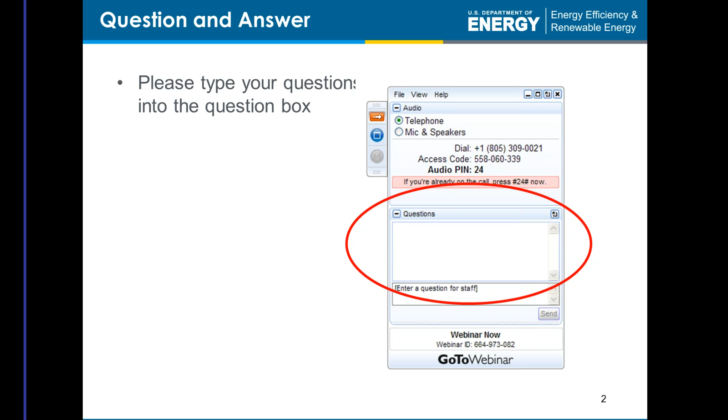With that, I would like to introduce our DOE host, Neha Rustagi, joining us from the Department of Energy headquarters in Washington, D.C. Neha has been a technology manager within the Hydrogen Production and Delivery Program at the Fuel Cell Technologies Office since November. Prior to her current role, she supported FCTO as a fellow since 2014. She obtained a master's in mechanical engineering from the University of Colorado Boulder in 2012 and conducted her thesis research on the modeling of hydrogen-assisted fatigue crack growth.

It's a pleasure to have you, Neha. Good afternoon. Thank you, Chris.

Our presenter today is Dr. Joe Ronevich from Sandia National Laboratory. Joe has been with Sandia's Hydrogen Effects on Materials Laboratory since 2012 and focuses on hydrogen embrittlement of structural materials, with a particular emphasis on welds and pipeline carbon steels and stainless steels. In addition to funding from the Fuel Cell Technologies Office, he received an Early Career Laboratory-Directed Research and Development Award in 2015 to support his research on measuring hydrogen concentrations ahead of crack tips. Prior to Sandia, Joe received his PhD from the Colorado School of Mines in Metallurgical and Materials Engineering.

During his time at Sandia, Joe has been working closely with Dr. Brian Somerday, who many of you probably know. Brian was originally going to join us on this webinar, but got called into jury duty, so Joe will be presenting for both of them. Brian has been at Sandia for 18 years, leading the Effects on Materials Laboratory and serving as a PI on numerous R&D projects related to embrittlement of structural materials in hydrogen gas environments, including projects supporting the Fuel Cell Technology Office's mission. He will be transitioning from Sandia to Southwest Research Institute in San Antonio, Texas this spring. At SWRI, he will apply his expertise in hydrogen embrittlement to applied R&D projects focused on structural metals in wet H2S. Since Brian expects to remain active in the hydrogen embrittlement community, he expects to continue crossing paths with many of you. And with that, I'm going to turn it over to Joe.

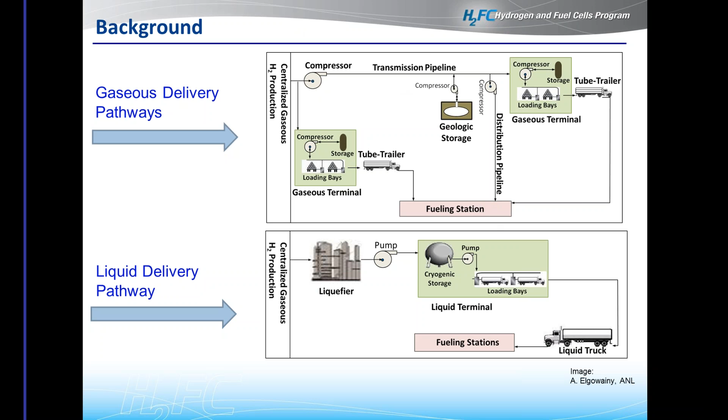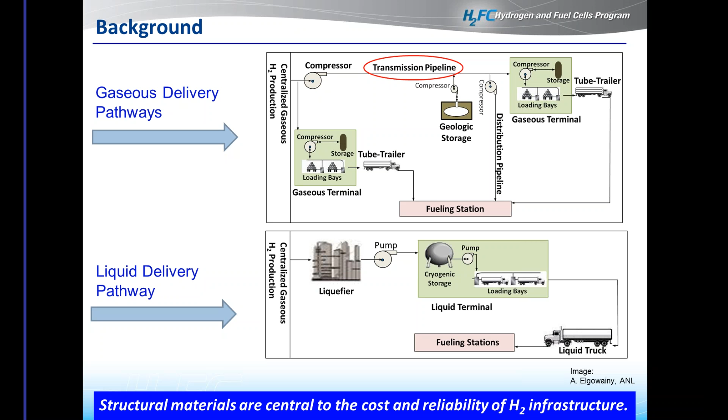In a hydrogen economy, the infrastructure necessary to transport hydrogen from a centralized gas production facility to the final stage, the fueling station, requires many different components exposed to hydrogen gas. Hydrogen in gaseous form must be compressed and transmitted over many miles of pipe, with various storage facilities and distribution pipes along the way. Our group at Sandia focuses particularly on the transmission pipeline. Structural materials are really central to driving the cost and reliability of the hydrogen infrastructure.

Welding is one aspect we need to make sure we don't overlook, because oftentimes welding can introduce other potential defects into the microstructure that we want to be looking at.

Now friction stir welding is another technique that's a little bit more modern and is a solid state weld. It requires no consumables. Essentially the weld pieces are placed together, a tool is inserted and rotated at a high RPM, allowing softening and stirring of the material. These are two different welds we'll take a closer look at during this presentation.

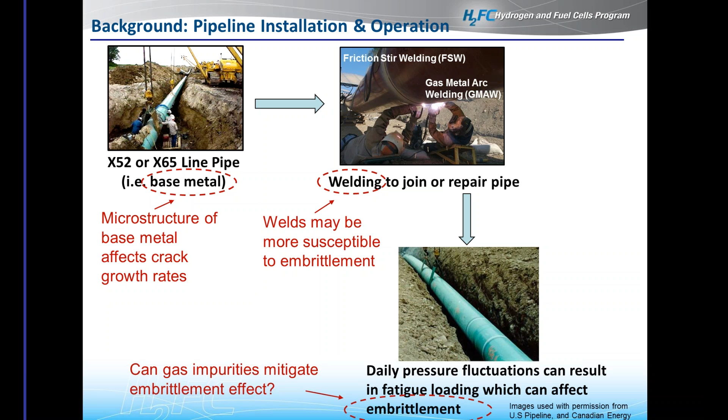The three variables I'm focused on in this talk are: how does the microstructure respond, how does that play a role in fatigue crack growth rates in these pipes, and as for welds, the lack of literature out there until recently made us aware we need to perform more testing to ensure the reliability of the welds. Finally, with respect to embrittlement, I'll talk at the end about the potential benefits of having gas impurities in the stream and how they can mitigate the embrittlement effect.

But what's really important is the local stresses and strains at the crack tip. What's driving the hydrogen to a specific site, and what's happening in that local region, is where we truly want to understand what's going on.

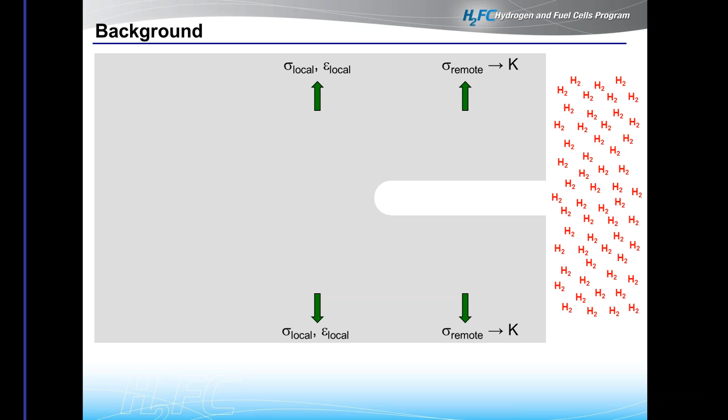If hydrogen is present, that doesn't necessarily indicate that we will have hydrogen embrittlement. There are many steps that actually need to occur in order for hydrogen to get to the site where it can cause embrittlement, and those are often overlooked. We just assume if there's hydrogen, then there's hydrogen embrittlement, but really multiple steps have to happen.

First, the hydrogen has to be able to transport down the crack tunnel, essentially reaching the crack tip. So basically it becomes a supply issue: can that hydrogen get to the site where it needs to, or where it may cause embrittlement?

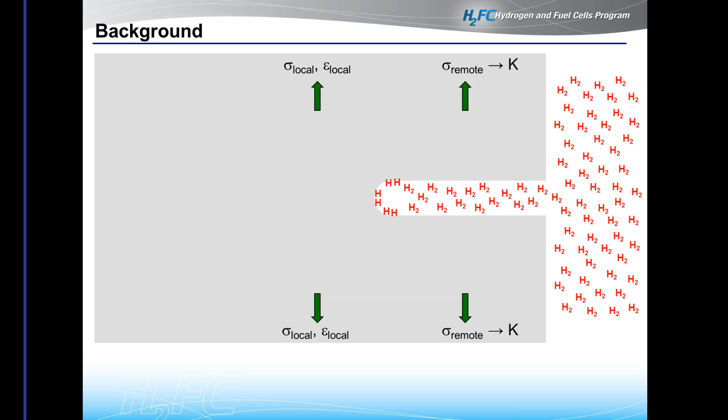The second step is that the hydrogen is in diatomic form. It needs to dissociate and chemisorb on the surface. This is just one of the possible limiting effects, but hydrogen does need to dissociate onto the surface, and then it can finally absorb into the material and move to regions of higher stress and take part in this embrittlement effect.

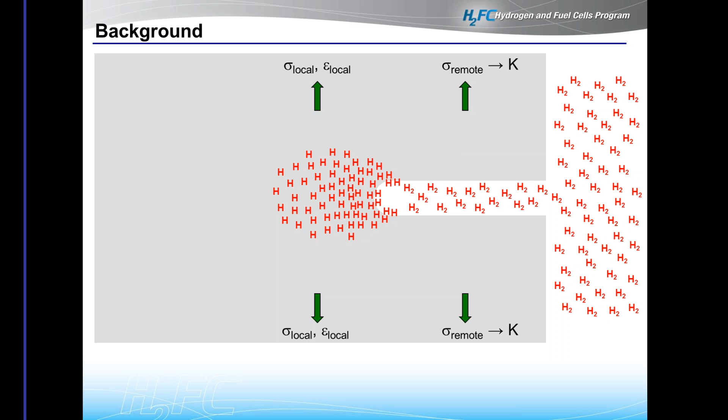So the three variables we're going to look at first relate to how hydrogen, once in the material, interacts with the microstructure. In particular, we're going to look at some welds and really the role that residual stress can have, because anytime you're talking about welds, what you're really introducing are potential changes in residual stress.

The other area we're going to look at is the effect that microstructural banding can have on hydrogen embrittlement. Banding is not necessarily desirable - it definitely is not a desirable microstructure - but it does give us the opportunity to examine how different orientations behave if we propagated the cracks in different orientations.

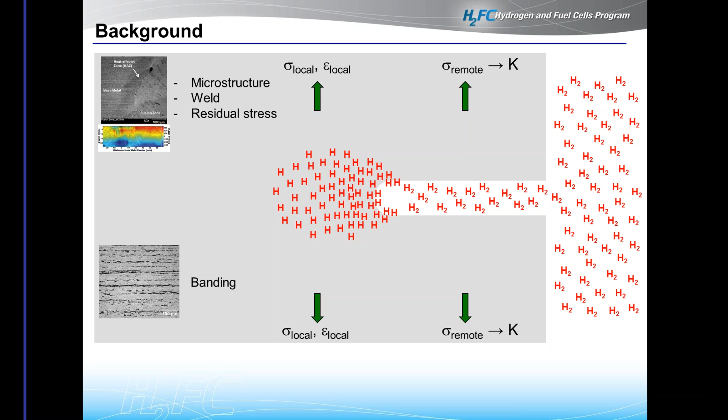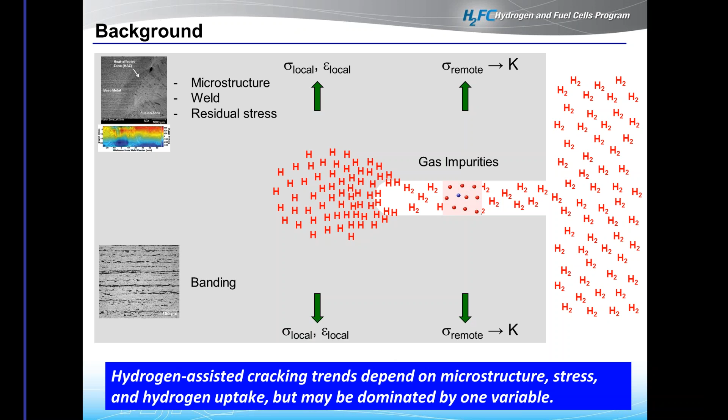And then finally, we're going to look at how gas impurities, in particular oxygen, play a role in hydrogen uptake. So the three different regions we're going to look at, and how they influence hydrogen-assisted cracking, are the microstructure, stress, and finally hydrogen uptake.

So the question is, why should we use steel hydrogen pipeline? I just identified that steel has susceptibility to hydrogen, but the reality is we have a lot of confidence in steel. We've been operating pipelines for many years, especially in the oil and gas industry, and they're quite robust - resistant to third-party damage during installation, backhoe, whatever it may be.

The reality is the idea of a hydrogen pipeline made out of steel is not unique. In fact, there are over 1,500 miles of steel hydrogen pipelines already in use in the U.S. The difference is that these pipelines have been operated very safely, but predominantly under constant pressure conditions, because the demand has been pretty constant, so you can supply a constant pressure to meet those demands.

Now, in a mature hydrogen market, the demands we anticipate will fluctuate throughout the day, throughout the year, throughout the season. Therefore we're going to introduce fluctuations in the loads to our microstructure or to our pipeline, so we need to be aware of how the base metal and the welds really behave to these fluctuating loads.

So along with that, we want to perform experiments that are realistic - in other words, testing service conditions that we actually anticipate the pipe to experience. This will help optimize our design codes so that we don't over-design our pipe in a way that costs us a huge premium, and this will help ensure the reliability of our pipe.

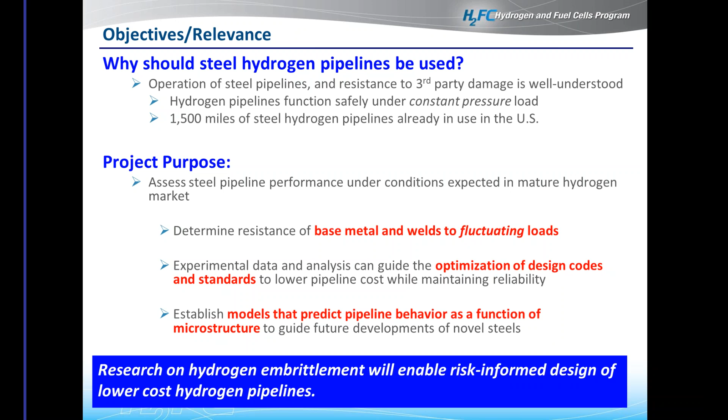So the approach we're taking here at Sandia is we have our core capabilities in our hydrogen effects on materials lab, and we're able to perform these tests in high-pressure hydrogen gas. We're choosing industrially relevant pipeline grades, and testing them in a service environment that we anticipate these hydrogen pipelines to be exposed to.

So the fatigue crack growth data that we generate is the basis for what's going into the ASME B31.12 code, which is the code that will be used by a pipeline designer to spec out what size thickness and what size diameter - all the specs necessary if they're wanting to put in a hydrogen pipeline.

I have two different welds shown here, and these are the two welds we're going to be looking at. So we're going to be looking at differences in microstructure, differences in microstructural banding, and then, as I mentioned before, at the end I'll briefly touch on how gas impurities can actually have somewhat of a beneficial effect.

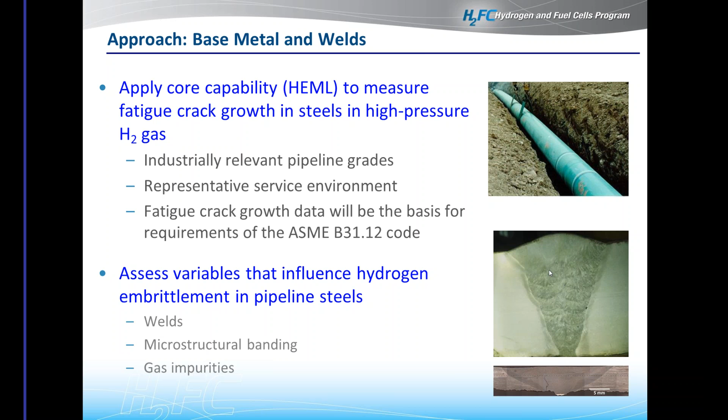The two pipelines we looked at are X65, which is girth welded, produced using a gas metal arc weld. Gas metal arc weld is a MIG welding process in which the weld is built up through consumables, and it's a multi-pass weld. You can see that the microstructure of the fusion zone is distinctly different than the base metal, and you can actually see this halo region around the weld where you have the heat affected zone.

The other pipe we looked at was an X52 pipe, also girth welded, but using friction stir welding. As I mentioned, the welding process is completely different—there's actually no melted metal. It is just friction produced by the stirring process that softens the metal and allows it to mix. So the resultant microstructure is actually quite similar to the base metal.

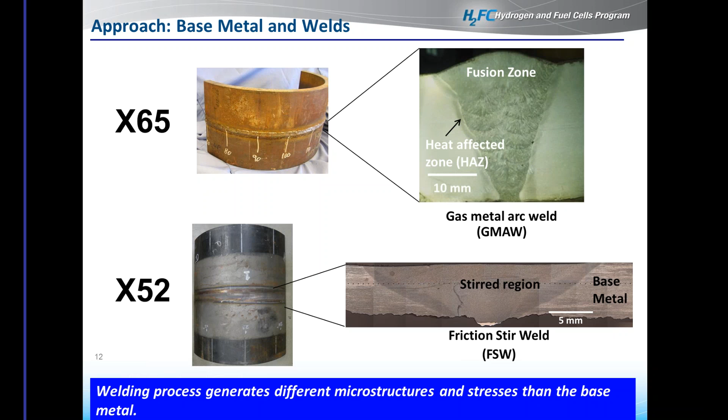So we looked at these different microstructures between the base metal and the weld. First, looking at the X65, if you look at the middle of the screen at the three different orientations of the pipe, I've called them out as L, C, and R. Because this was supplied to us as a pipe, L stands for longitudinal direction, C for circumferential, and R for radial. You can see this actually was a banded microstructure to begin with.

What I mean by that is if you look in the L and C planes, you see these distinct regions of the darker phase, which is the pearlitic region, and then the lighter phase is the ferrite. This is just an artifact of the processing technique—during original solidification, you end up with this banded microstructure. But the overall microstructure for the base metal was a ferrite pearlite microstructure.

The weld microstructure itself was distinctly different from a ferrite pearlite. It was various morphologies of ferrite, including grain boundary ferrite, allotriomorphic, and some Widmanstätten ferrite, as well as some dispersed carbides. But it was a refined microstructure as compared to the base metal.

The heat affected zone microstructure really appeared to be like an annealed base metal, an annealed ferrite pearlite, which is really what had happened, because as the welding process heats up, that heat is absorbed into the surrounding material and affects the microstructure around it.

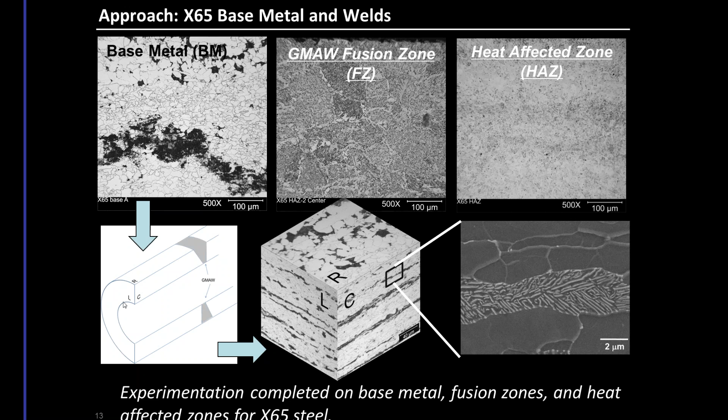So this was the first set of microstructures we looked at. I've used this schematic—I'll use it throughout the talk—to help guide where specimens were extracted with respect to the weld, and it shows the different orientations. So that's what these L, R, and C values mean.

We also looked at a friction stir weld, which was a thinner walled pipe. We extracted specimens out of the center of the fusion zone, as well as an off-center region, and the base metal. These dashed lines represent the crack plane, and in this case they'd be moving in and out of the screen. So that's where we situated the specimens, so we'd be testing a more or less uniform microstructure as the crack progressed through the material.

The base metal microstructure consisted of a ferrite pearlite microstructure. The friction stir weld didn't look all that different, although it had not as much pearlite—it had more dispersed carbides throughout the microstructure. The off-center region looked fairly similar to the base metal. But we really wanted to get a good overall characterization of how the different microstructures were going to behave in this friction stir weld.

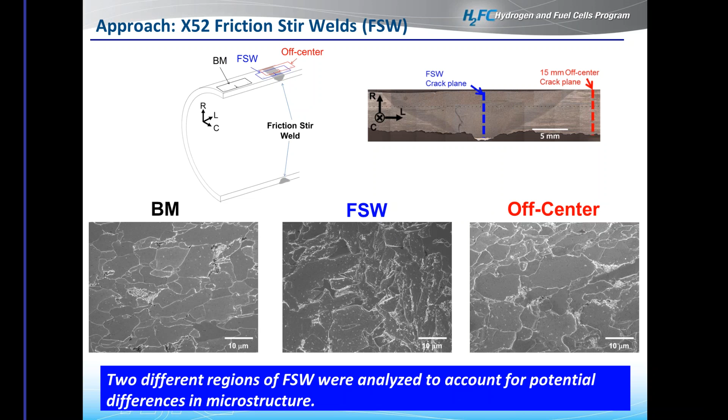Under high pressure conditions, we used two different specimen geometries, really just to match our material constraints. So we tested compact tension specimens as well as single edge notch tension specimens.

For the loading applied, we consulted with the ASME B31.12 committee, and it's an optimization of testing frequency and R ratio. These tests were performed at an R ratio of 0.5. What that means is, if the maximum pressure of our pressure vessel is 3,000 psi, we're cycling between maximum pressure and half the maximum pressure, so 1,500 up to 3,000.

That's what we're really trying to simulate by this. The frequency that we tested at was 1 hertz, and this became a balance of testing at lower frequencies. We've observed that the effects of hydrogen can be more dramatic or enhanced, but really it's an optimization, because testing at lower frequencies requires a larger amount of time for the test to complete. So that's the parameters we settled on for the majority of our tests.

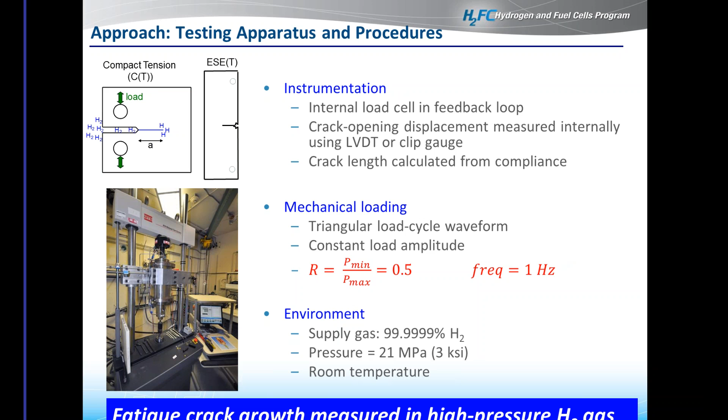So in order to really optimize what we're trying to do here, we want to perform experiments in the condition most similar to what the pipeline will experience. We can do these tests in high purity hydrogen gas and develop fatigue crack growth curves that look just like this. Essentially, from that, we can incorporate them into a fatigue life analysis based on a fracture mechanics approach.

In other words, if we have a pipe and we know we want to move a certain volume through it, that dictates a bit of the radius. We assume we have an initial flaw, identified here as A. We can then use these experimentally measured fatigue crack growth curves and essentially get a fatigue life of the pipe.

So if we have a pipe that we want to last for 50 years, we know what the critical crack depth is. If we design with a safety factor of 2, so we want the pipe to get 50 years of life while the crack is still only at half the critical depth, we can do those calculations now that we have experimental results from fatigue crack growth relationships. That's really the ultimate goal of our work.

We're doing a lot of the experimental work, but it's nice to see, and I'll show a calculation towards the end of the discussion, how we've incorporated our measurements into these calculations to predict what thickness pipe is required to satisfy this criteria.

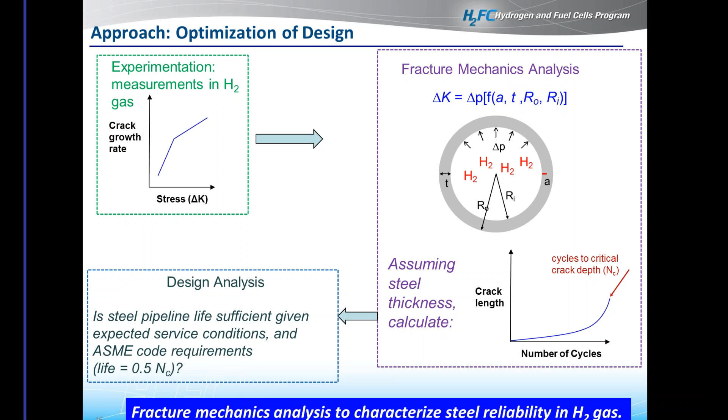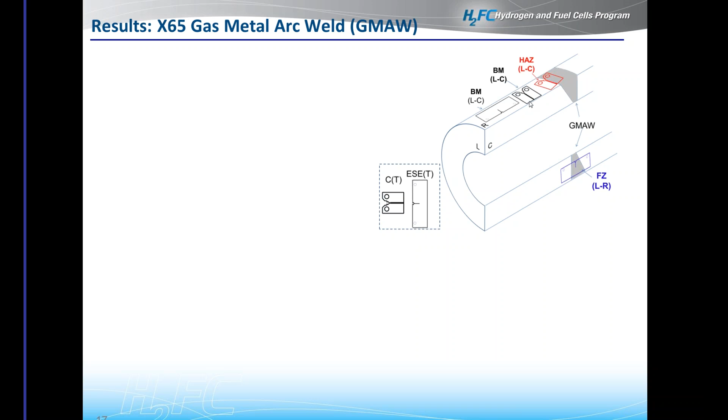So the results now of the X65 gas metal arc weld, these schematics up here serve as a legend for the fatigue crack growth curves. We tested in the fusion zone, and they also show what specimen geometry was tested for each condition. We performed tests of the fusion zone here in blue, the heat affected zone in red, and the base metal in black. So what we have here are the fatigue crack growth curves.

Backing up slightly, what this curve represents is on the x-axis we have the delta K applied, which is the stress intensity factor applied, or the driving force we're supplying to get something to happen. The y-axis is the crack growth rate, which is the material response. So we're basically applying a driving force and measuring the material response.

As you look at these curves, first of the base metal tested in air, shown in black, this is the typical trend you see in a more inert or air environment, where you see a very linear trend - with increasing delta K applied, you get an increasing crack growth rate, and that linear response is pretty common.

The terminology of hydrogen accelerated fatigue crack growth really comes from looking at these lower delta K regions. You can see the 3 different microstructural regions we tested were the fusion zone, base metal, and heat affected zone, and the crack growth rates begin to accelerate at these lower delta K regions. This is where the terminology hydrogen accelerated fatigue crack growth comes from.

So in general, all 3 showed similar relationships on a very macro scale. At lower delta Ks, they became somewhat coincident with the data in air, and then you begin to see them accelerate quite rapidly, then somewhat follow a similar slope as the data in air, albeit about an order of magnitude faster crack growth rates than in air. Looking more closely at the details, we ran triplicate tests of each condition and saw good repeatability among them.

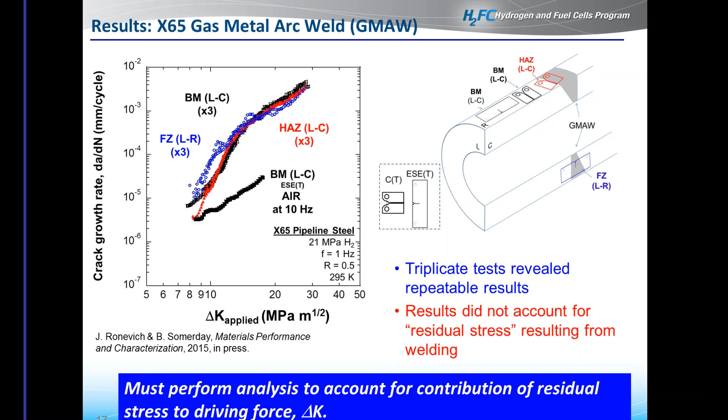So we knew we needed to perform a little bit more analysis to tease out what was going on with residual stress and how that was influencing our applied driving force, or the effective driving force, I guess. So we did some further analysis specifically on the heat affected zone.

And what we found was when we removed the effects of residual stress, we got a shift in the curves. I've identified them as the non-corrected version, which was what we saw on the previous slide, and the corrected version that's shown now on the red dash line.

And so really what this dAdN versus delta K curve shows us now is that once you remove the effects of residual stress and use a known driving force, you can actually measure the material response more accurately and more reliably.

The reason we're doing this is that a 1-inch thick weld pipe that is welded together is going to have different residual stresses than a 1/4-inch thick weld pipe or a 1/2-inch thick weld pipe. So the fatigue crack growth curves on the previous slide really don't differentiate that. It's just what that exact pipe is.

And our ultimate goal is to characterize the intrinsic microstructural response to hydrogen, and we can't do that if we're masked by some residual stress. So this essentially represents a more accurate presentation of what's going on with heat affected zone microstructure as opposed to the base metal.

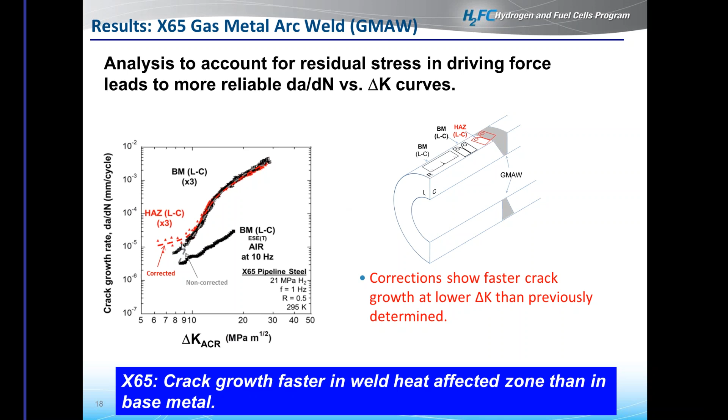Now we also looked at an X52 friction stir welded pipe, and as I show here in the schematic on the right, we looked at 3 different areas: the base metal, the blue is the center of the fusion zone, or center of the friction stir weld, and then the off-center region is shown in red. As I mentioned before, the dashed lines represent the areas where the crack plane would be propagating through.

The results of these: first of all, the base metal in air shows very similar trends to what we saw with the X65, a very linear response. And we also see hydrogen accelerated fatigue crack growth in these X52 pipes.

The 3 areas: the friction stir weld had a slightly higher crack growth rate than the base metal, which is slightly higher than the off-center region. And once again, we saw very good reproducibility or repeatability among triplicate tests.

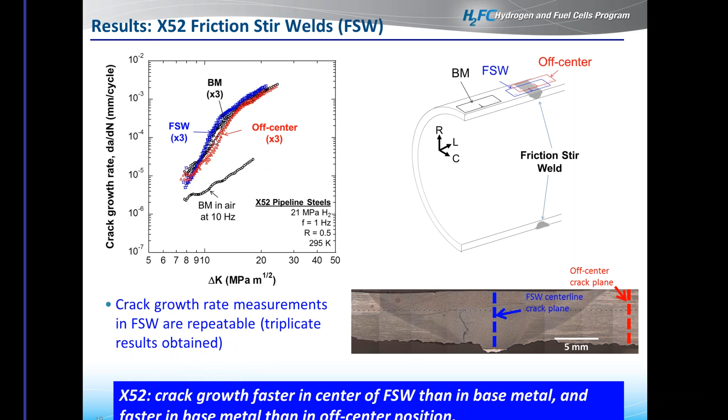So what happens when we take all this data of all the welds that we've tested and put them on one plot? I've only used single curves for these because it got a little messy if we tried to plot them all. But what you see here is you have the X65 girth weld, which was a gas metal arc weld, and the X52 friction stir weld.

We also borrowed some data from our friends at NIST, who'd done some testing on the X52 vintage girth weld, so it was a weld made many years ago. And what you see is the overall trend is that they're behaving quite similar, especially when we compare them to an X52 base metal.

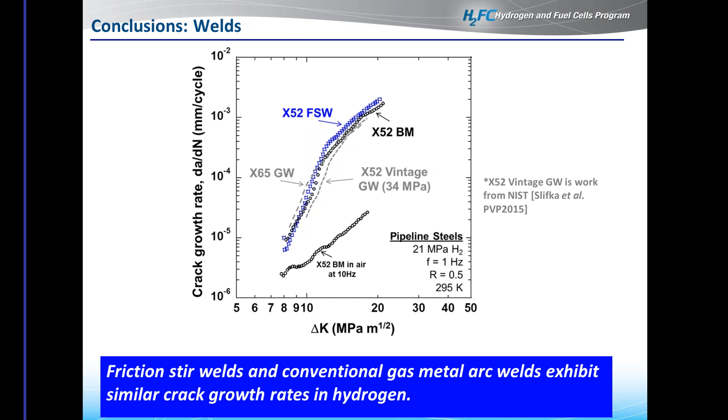And so this is very encouraging because it basically opens the door for other welding techniques such as this friction stir welding, and we see that we're gaining confidence in the reliability of that weld.

Now we also took a little bit of liberties in the fact that we had a banded microstructure. So one of the questions that comes up is how does microstructure really impact the fatigue crack growth rate? Does it really have much of an effect, or is it that dramatic, or can we call it all kind of the same material?

Even though this is a ferrite pearlite steel, the fact that it is banded gives us the capability to test the material in different orientations. If we propagate the crack through the microstructure, for instance in the CL and LC orientations, these dashed lines represent the crack plane. You can see that they're encountering the same microstructure as they propagate through that cube, essentially parallel planes of ferrite and pearlite, so maybe they'll behave similarly.

That's what we would anticipate. The LR orientation, as you can see on the top of the cube, is now propagating through these layers of ferrite and pearlite.

So although a banded microstructure is far removed from what we'd call a technologically optimal microstructure to look at, we can use the fact that we have this pipe material in our hands and do testing which will allow us to really see what the effects of microstructure are, and really different extremes.

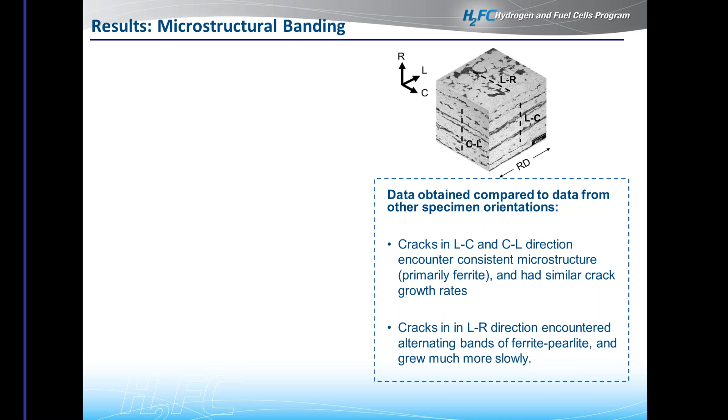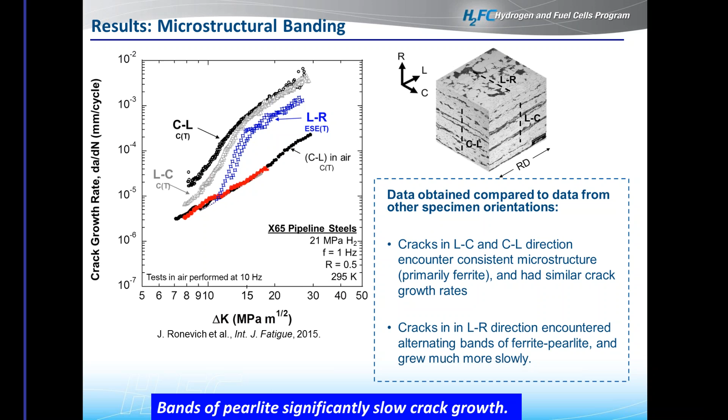Now contrast that with the CL orientation, in which we have short circuit pathways for hydrogen to diffuse through the ferrite, and hydrogen is therefore able to move through much more quickly, so we won't have a hydrogen supply issue.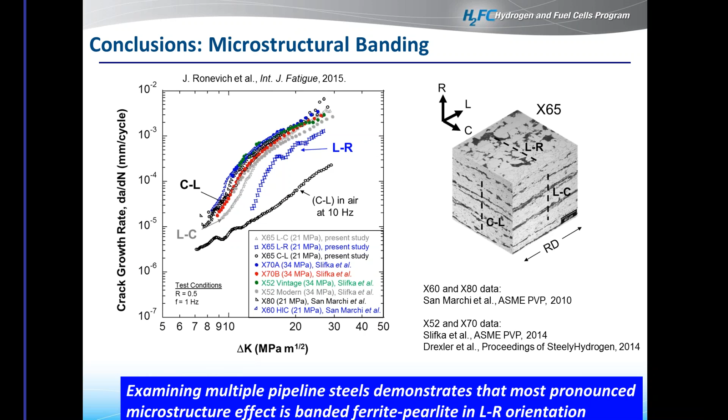This gives us a little more insight that the microstructure really is playing a role, and it's not necessarily related directly to strength, because X80 steel is going to be much stronger than X52, but really we need to be paying attention to what the microstructure is doing.

So now we've measured the fatigue crack growth behavior, and we can use that to help calculate what a minimum wall thickness may be needed for hydrogen steel pipes. What we did was say, okay, we want a pipe that lasts 50 years, and we would assume we have 2 cycles a day occurring on that pipe.

So there are two variables we analyzed. There are many variables that affect this, but the two that have one of the most dramatic effects are the pressure ranges we're actually testing at. In this case, in bold, we see the 3,000 psi, this would be a pipe cycling between 3,000 psi down to 1,500 psi twice a day for 50 years.

The other critical variable is the initial flaw depth. We assumed that with modern technology, we could probably measure wall thickness flaws on the order of 3% or 5% of the wall thickness in this column. From that, we can perform these fatigue life calculations now that we've measured the fatigue crack growth relationships of these pipeline base metals.

Based on these calculations in fracture mechanics, we can determine the necessary minimum wall thickness to sustain pressure cycles that range from 3,000 to 1,500, and at a crack in the wall that is 3% of the wall thickness, we need a thickness of pipe that is 0.62 inches. As we have a slightly higher flaw depth to begin with, that increases our necessary wall thickness up to 0.81 inches.

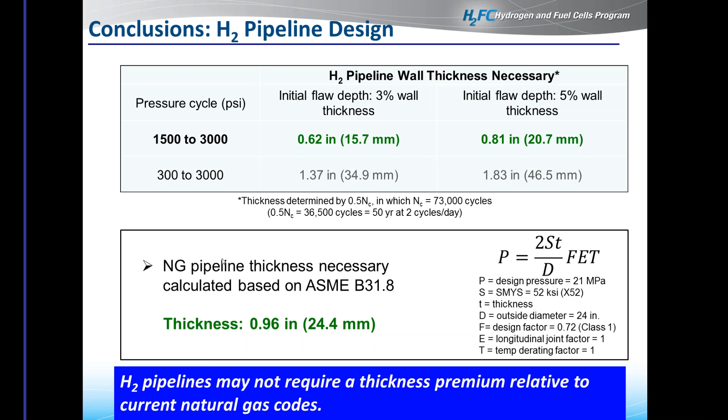So what this really means is that using experimental work and a fracture mechanics-based approach, we see that the hydrogen pipelines' actual required thicknesses aren't any thicker than the current natural gas. Now, we wouldn't prescribe that the pipe should be thinner than natural gas, but nonetheless, this basically says that we don't need a thickness premium on these hydrogen gas lines as opposed to natural gas, based on the current natural gas code.

So I'm going to switch gears a little bit. I've talked about how hydrogen affects the mechanical behavior, in terms of how it accelerates the fatigue crack growth rate. But now we're going to look at how oxygen impurities can actually help mitigate the effect of embrittlement.

Just to orient yourself, we basically looked at the potential energy—if we look at a surface of iron, these gold spheres represent iron atoms, and as diatomic hydrogen approaches the surface, there's a certain activation energy necessary for that hydrogen to dissociate and then diffuse into the surface. That's represented by EA on this curve, which is 0.1 electron volts.

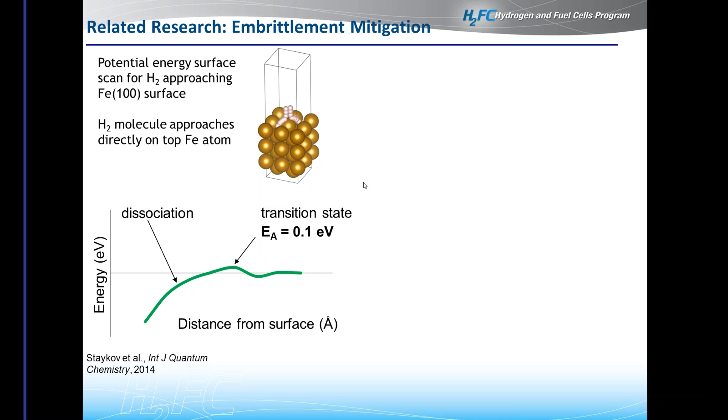If we now look at that same surface, but with the assumption that there was already some pre-adsorbed oxygen on the surface, you can see that for this hydrogen to dissociate onto the surface, the activation energy is actually increased. Using these density functional theories, it already tells us that just having the presence of oxygen pre-adsorbed on the surface makes it more difficult for that hydrogen to get in. So we wanted to take this type of analysis and do some experimental work to try and verify it.

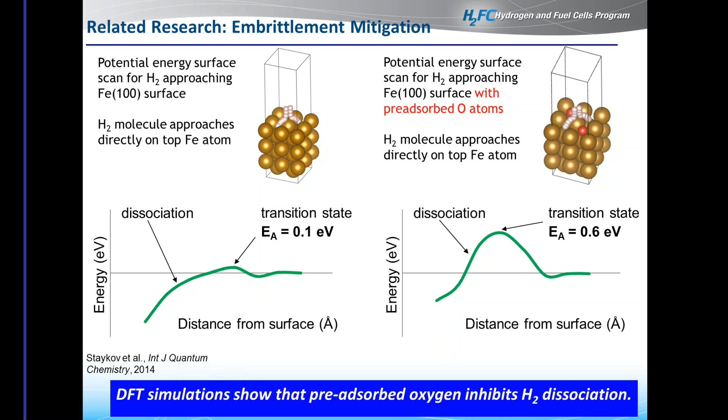This actually worked into and was built into a model with several of our collaborators. We took an X52 pipeline and performed our typical tests: fatigue crack growth tests in air, represented by the blue X's, and in high purity hydrogen, represented by the red curve. You see hydrogen accelerated fatigue crack growth occurring at a low delta K and at a low da/dN.

What we did was take a fixed amount of oxygen mixed species—10 ppm, 100 ppm, and 1,000 ppm oxygen—introduced to the hydrogen gas, and performed tests in those environments. First, looking at 10 ppm oxygen, we didn't see a significant change from high purity hydrogen, telling us we didn't have much oxygen already pre-adsorbed onto the surface. But at 100 ppm, the curve actually follows the data in air up to a da/dN of approximately 10 to the minus 5 millimeters per cycle.

Then we begin to see hydrogen accelerated fatigue crack growth occurring, and it converges with the other curves. As we move to a higher oxygen content of 1,000 ppm, we see that the da/dN at which hydrogen accelerated fatigue crack growth occurs is pushed to a higher value.

Once again, we get accelerated fatigue crack growth rate, which converges with that in pure hydrogen at higher delta K. But really, we're seeing an incremental difference between different amounts of oxygen and when we see the onset of hydrogen accelerated fatigue crack growth.

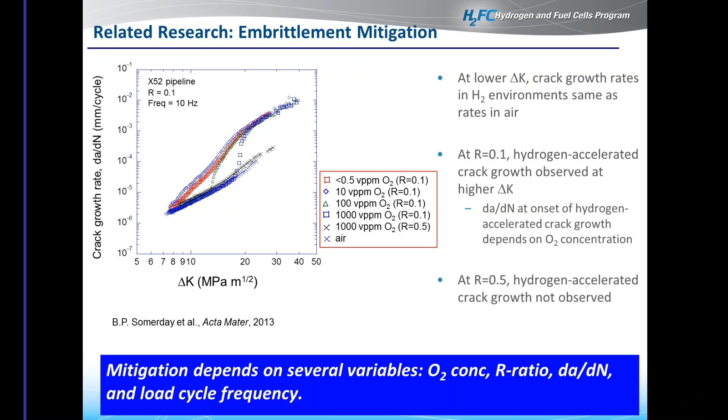So just to go briefly into the model, I only have a few slides left, but just to give you an idea of how the model was fabricated or come up with.

If you imagine here in the upper right corner, we have a crack represented by length A, and we have a mixed species of oxygen and hydrogen. We have to assume that this crack is going to grow just by regular inert environment crack growth mechanisms, basically a series of blunting and resharpening, as we typically assume in fatigue. So that crack advances slowly, introducing fresh surface, and then it becomes a competition for the oxygen or the hydrogen to adsorb onto the surface.

So if we look at the lower delta K region, or a lower stress, at a specific delta K you get a specific amount of crack growth. As the crack advances, this fresh surface is exposed, and in this situation there's sufficient oxygen to fully passivate the surface, so we don't see the effect of hydrogen-accelerated fatigue crack growth.

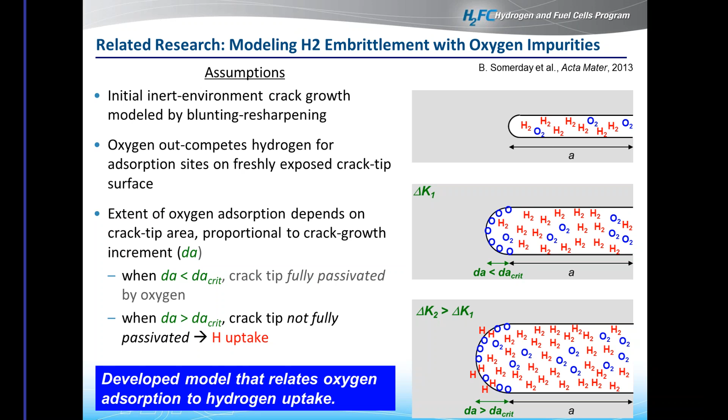Now, if we move to a higher delta K or higher stress region, we're able to advance the crack even further. This exposes even more fresh, essentially untainted crack surface area, and in this case there is not sufficient oxygen to fully passivate the surface. So this allows some hydrogen to get in, and this is a scenario where we begin to see hydrogen-accelerated fatigue crack growth because the oxygen is not able to fully passivate. So it really is just a competition between oxygen and hydrogen for surface sites.

Part of the model hinges on modeling the crack profile, or the crack tip area. But the key assumption is that it's rate limited by the amount of oxygen that can diffuse down the crack channel and adsorb onto the surface. So we used a steady state profile of oxygen, assuming that the partial pressure of oxygen is consistent back in the bulk of the gas, but has a linear trend down to the crack tip. Then it's just about modeling whether the oxygen delivered to the crack tip is able to be adsorbed within a load cycle.

You can imagine the frequency you're testing at affects how much oxygen is able to travel down there and how fast. Also the R ratio dictates what the crack profile will look like - in other words, is there a pulsing effect of gas species? So without getting too far into the details, really it's just a matter of the flux of this competition of oxygen getting to the crack site and being able to adsorb.

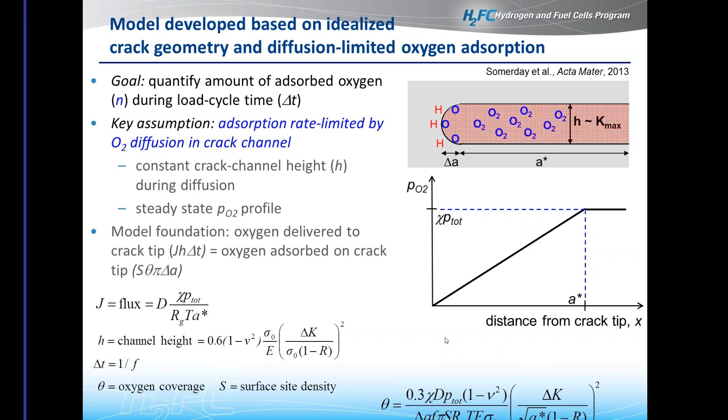And so the model is reflected in this equation in the bottom right corner, and what it's telling us is that hydrogen uptake and accelerated fatigue crack growth will occur when oxygen coverage is not sufficient to fully passivate the surface. So we applied this to the X52, and I'm not going to show how the correlation occurred, but it actually showed some pretty good correlation. So all these variables can really be modeled and help the possibility of mitigating the effects of hydrogen embrittlement.

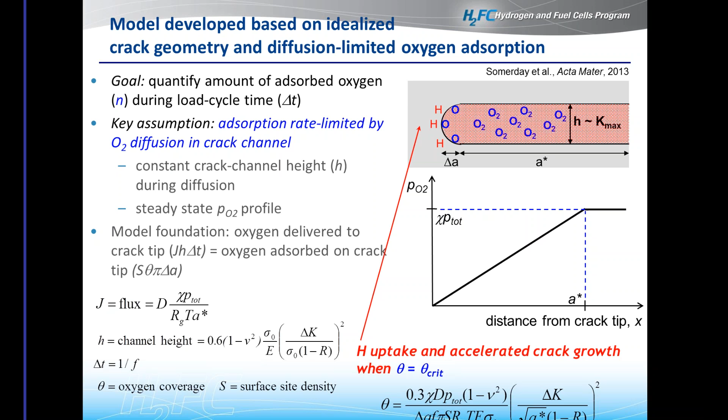So in summary, I'd like to briefly outline what we found. We saw that the strength of pipelines does not necessarily dictate how they behave in hydrogen. There's typically this thought that the higher the strength, the more susceptible they are, but it's actually more geared towards microstructure.

That seems to be more of a dominating effect. We looked at two different welds, a friction stir weld as well as a gas metal arc weld, and they actually showed fairly similar resistance, which potentially has some benefits in terms of cost savings from the friction stir weld standpoint. Overall, the welds had a slightly higher fatigue crack growth rate than the base metal.

And then doing some calculations, putting pen to paper and saying, okay, now that we have some experimental data, can we actually calculate what pipeline thicknesses are required to sustain a life of, say, 50 years? We found that given the current natural gas codes, those appear to be conservative enough for what we are looking at.

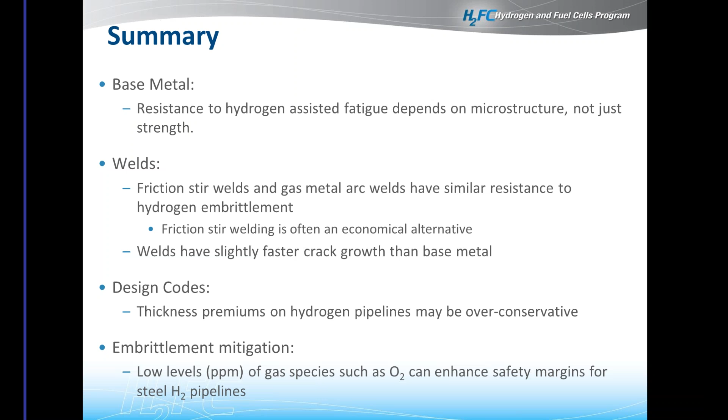And then finally, just from the kind of tangential study on oxygen effects, we found that low levels of gas species, such as oxygen, really help enhance or could potentially enhance safety margins by this mitigating effect they have on hydrogen embrittlement. So the remaining challenges that we're looking at...

We're actually looking at doing some higher strength pipeline steels, such as X80 or X100, and seeing if we can somehow see if those will qualify. Do they show similar trends to these X52 steels? And can we look more deeply at the microstructure?

Because there's going to be a lot of different microstructural grades put in the ground, and we don't want to have to do testing on every single pipe that goes in the ground. So really, we're working towards ultimately this model that will allow us to look at the microstructure and determine if that microstructure is sufficient for hydrogen use.

And then we can develop these predictive models that are based on the physics of hydrogen diffusion and what's actually going on in the material, such that we could select steels that are optimal for hydrogen without having to do experimental tests on every single one of them.

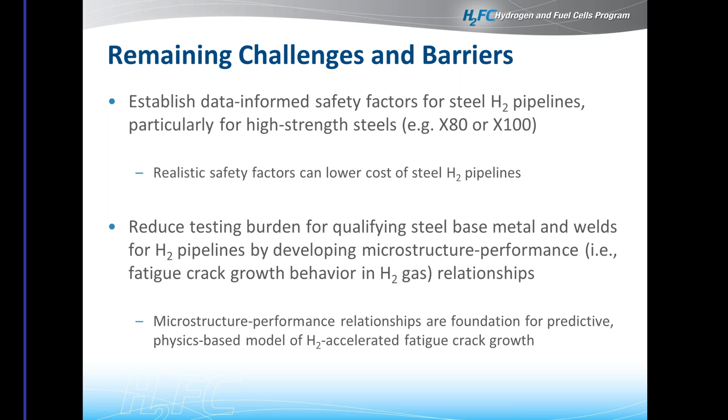So with that, I will conclude my discussion. And as Chris mentioned, these are where the questions are, if you would have any for me. And I'll pass it back to Neha. So thank you.

Thank you, Joe. So we have a handful of questions. So the first one was whether or not friction stir welding happens in the field.

So that's a good question. Friction stir welding is a process that can be challenging in the field because it does require some big equipment. It requires less manpower, I'd say, but in general it does require some specialized equipment, which does have a cost premium, but it can be done in the field. As of now, it's kind of a balance between man hours for the typical MIG welding or more of an upfront cost of the equipment for friction stir welding to allow it to be done in the field.

A couple of questions about impurities. I think maybe you sort of answered some of them towards the end, but one of them was why the choice was made to use high purity hydrogen gas rather than a lower quality to better simulate what's put in the field. And then another one was whether it's likely that impurities of other gases other than oxygen would similarly slow down crack growth.

Yeah, so those are two very good questions. The real reason we started looking at pure hydrogen is we really wanted to see the worst case scenario. We wanted to be as conservative as possible and look at what the extreme environment would be, which would be pure hydrogen without any impurities. So that's why we started looking at that.